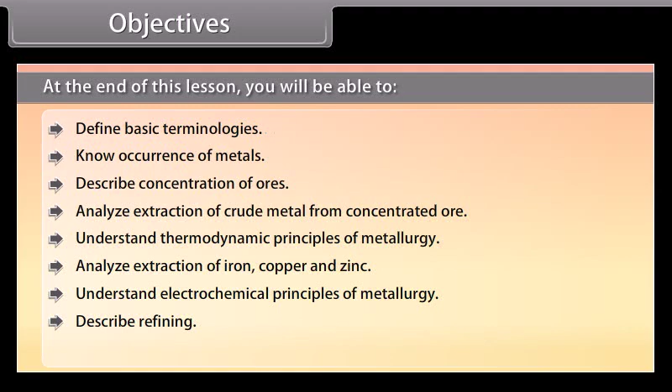At the end of this lesson, you will be able to define basic terminologies, know the occurrence of metals, describe concentration of ores, analyze extraction of crude metal from concentrated ore, understand thermodynamic principles of metallurgy, analyze extraction of iron, copper, and zinc, understand electrochemical principles of metallurgy, describe refining, and know the applications of aluminium, copper, zinc, and iron.

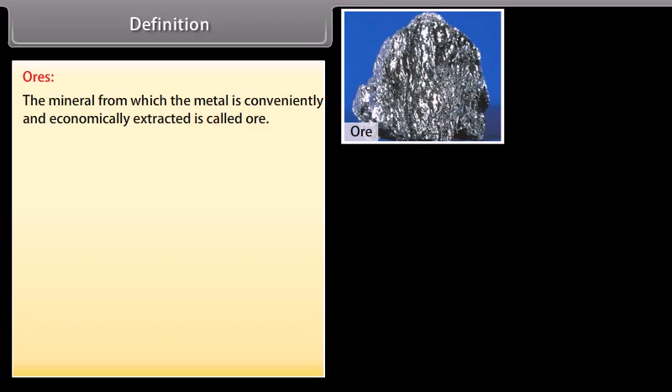Definition. Ores: the mineral from which the metal is conveniently and economically extracted is called ore. Gangue: the earthly and undesired constituents of minerals are called gangue. Metallurgy: the extraction and isolation of metals from ores is called metallurgy.

The extraction and isolation of metals from ores involves three major steps: concentration of the ore, isolation of the metal from concentrated ore, and purification of the metal.

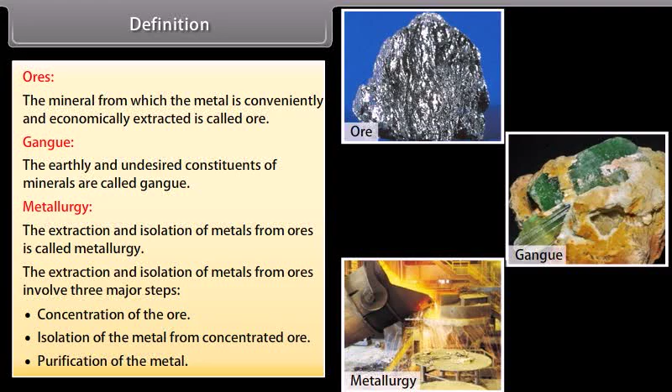Occurrence of metals. Oxygen is the most abundant element in the Earth's crust. Silicon is the second most abundant element in the Earth's crust. Among metals, aluminium is the most abundant. It is the third most abundant element in Earth's crust.

It is a major component of many igneous minerals, including mica and clay. Many gemstones are impure forms of Al2O3, and the impurities range from chromium to cobalt.

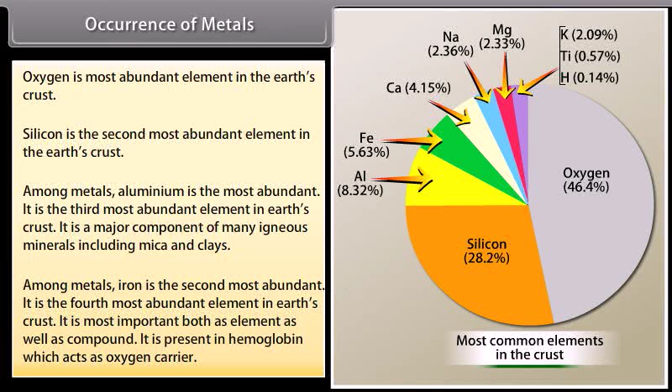Among metals, iron is the second most abundant. It is the fourth most abundant element in Earth's crust. It is most important both as an element as well as a compound. It is present in hemoglobin, which acts as an oxygen carrier.

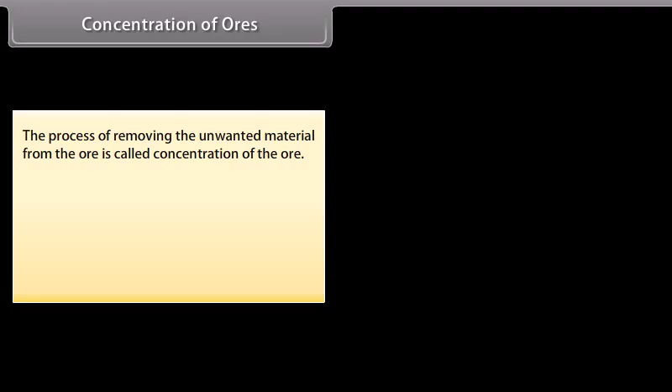Concentration of ores. The process of removing unwanted material from the ore is called concentration of the ore. The important methods for concentration of the ore include hydraulic washing, which is based on difference in densities of ore and gangue. In this process, ore is washed with a stream of water under pressure so that light impurities are washed away, whereas heavy ores are left behind.

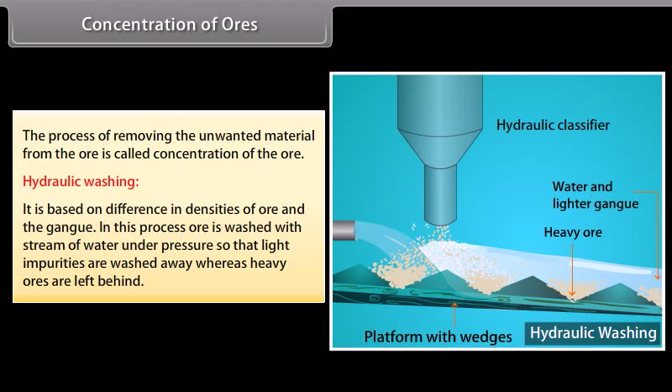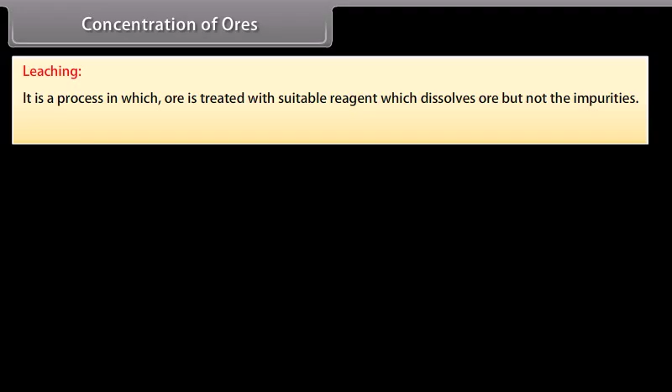Leaching is a process in which ore is treated with a suitable reagent which dissolves the ore but not the impurities. Leaching of bauxite is done to obtain alumina.

In this process, bauxite ore is treated with caustic soda. Al2O3 dissolves in the concentrated solution, leaving behind impurities. The aluminate in solution is neutralized by passing CO2 gas and hydrated Al2O3 is precipitated. The precipitate of Al(OH)3 is filtered, dried, and finally heated to about 1470 Kelvin to obtain pure Al2O3.

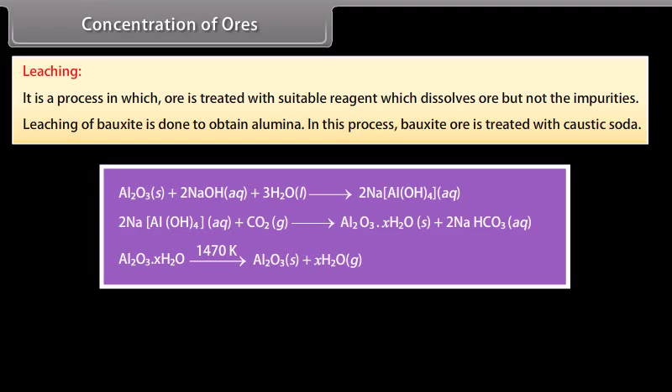Magnetic separation. This method is based on magnetic and non-magnetic properties of the two components of ore. The ground ore is carried on a conveyor belt which passes over a magnetic roller.

The non-magnetic particles leave the belt and fall off from it. The magnetic particles are attracted by the magnetic field and form a separated pile. This method is used to remove ore particles from cassiterite, magnetite, chromite, and pyrolusite.

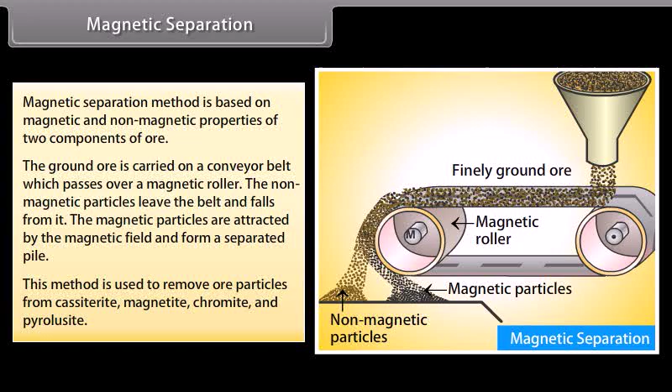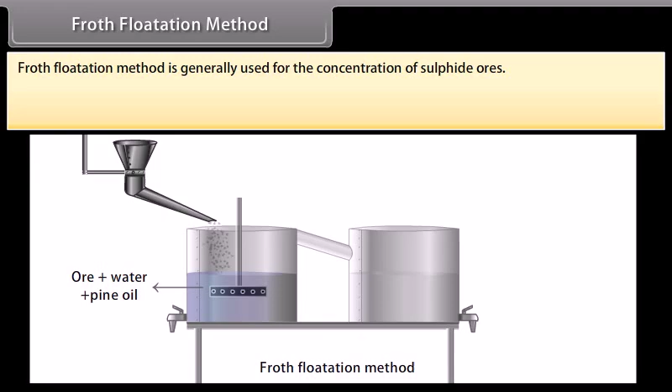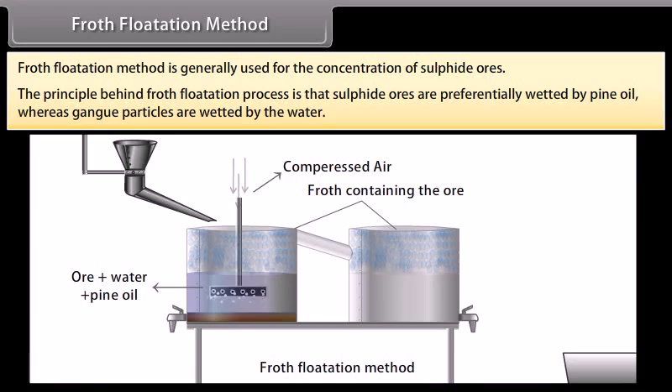Froth flotation method. This method is generally used for the concentration of sulfide ores. The principle behind the froth flotation process is that sulfide ores are preferentially wetted by pine oil, whereas gangue particles are wetted by water. In this process, a suspension of powdered ore is made with water.

Collectors like pine oil, fatty acids, and xanthates are added to it. Froth stabilizers like cresols and aniline stabilize the froth. The mineral particles become wet by oils while gangue particles by water.

A rotating paddle agitates the mixture and draws air into it. As a result, froth is formed, which carries the mineral particles. The froth is light and is skimmed off. It is then dried for the recovery of the ore particles.

Extraction of crude metal from concentrated ore. The concentrated ore must be converted into a form suitable for reduction. Oxides are easier to reduce. Thus, isolation of metals from concentrated ore involves two major steps: conversion to oxide and reduction of oxide to metal.

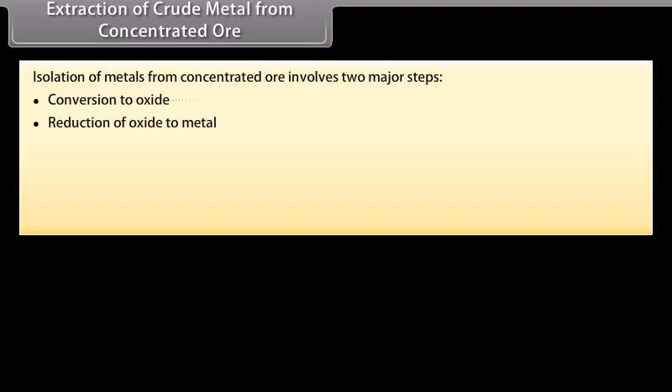Conversion of oxide: it is easier to reduce oxide than sulfide or carbonate ore. This can be done by two methods: calcination and roasting.

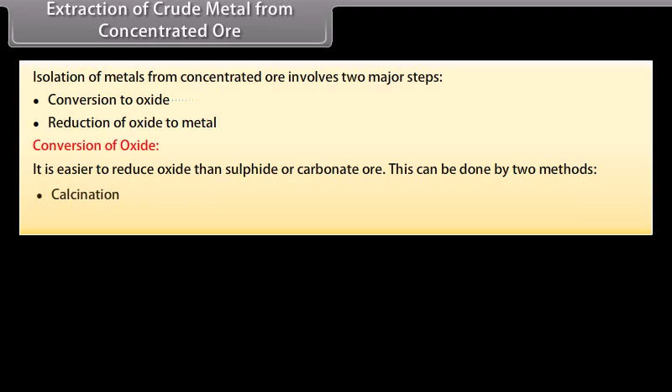Calcination involves heating when the volatile matter escapes, leaving behind the metal oxide. Roasting is a process in which ore is heated in a regular supply of air at a temperature below the melting point of the metal. Sulfide ores are converted into oxide by roasting.

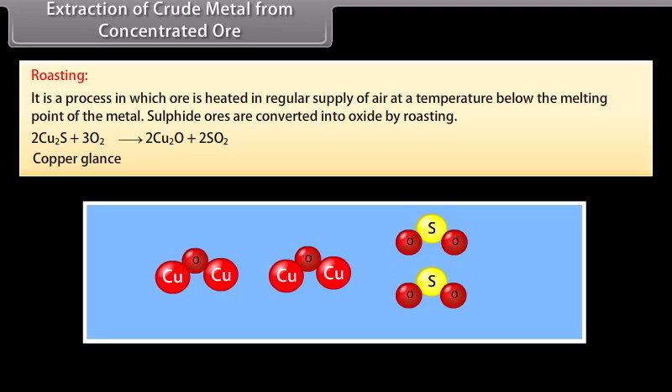Reduction of oxide to metal: the process of converting metal oxide into metal is called reduction. It needs a suitable reducing agent depending upon the reactivity or reducing power of the metal, for example, carbon, carbon monoxide, aluminium, and magnesium.

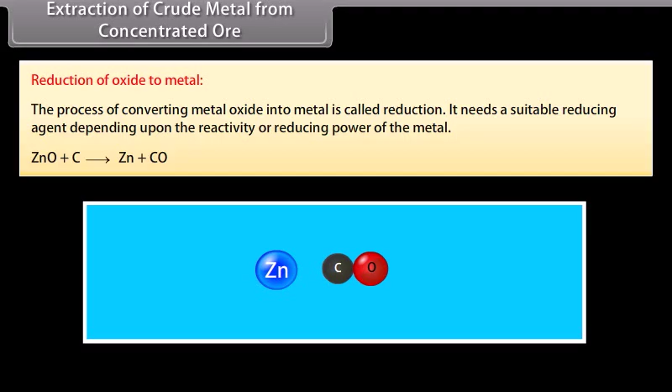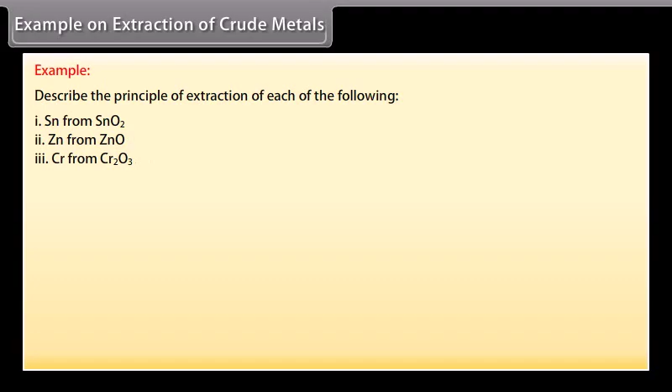Let's see the solution. Sn is obtained from SnO2 by using carbon as a reducing agent, since Sn is a less reactive metal. Zn is obtained from ZnO using CO as a reducing agent at 1600 Kelvin. Cr is obtained from Cr2O3 using the aluminothermic process.

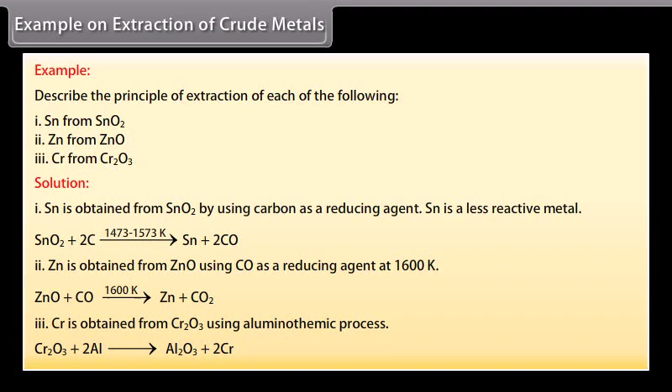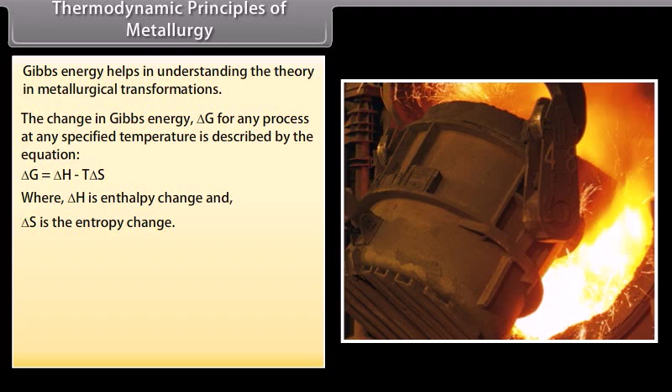Thermodynamic principles of metallurgy: Gibbs energy helps in understanding the theory in metallurgical transformations. The change in Gibbs energy, delta G, for any process at any specified temperature is described by the equation delta G equals delta H minus T delta S, where delta H is enthalpy change and delta S is the entropy change. When the value of delta G is negative, only then will the reaction proceed.

If reactants and products of two reactions are put together in a system and the net delta G of the two possible reactions is negative, the overall reaction will occur.

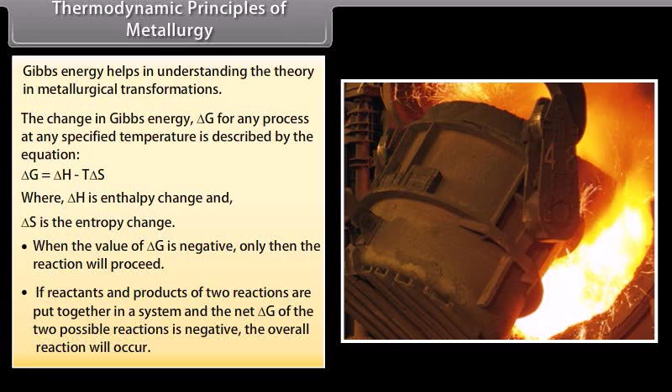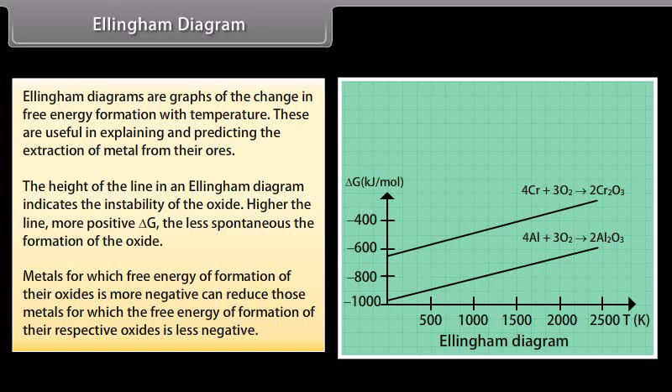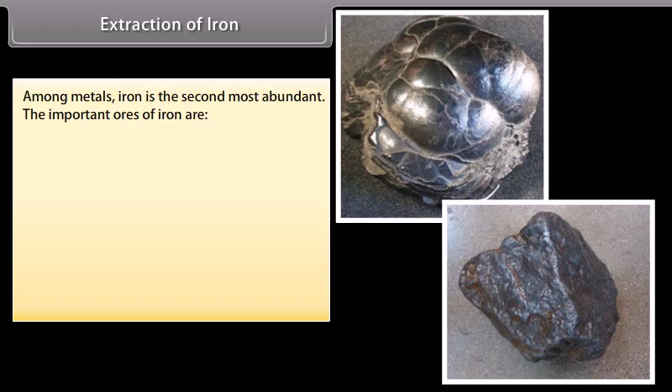Extraction of iron: among metals, iron is the second most abundant. The important ores of iron are hematite or red iron ore, limonite or brown ore of iron, magnetite, and siderite. Iron is generally extracted from its oxide ores. The ores generally have 20 to 55% iron.

Concentration of the ore: impurities of clay, sand, etc. are removed by levigation.

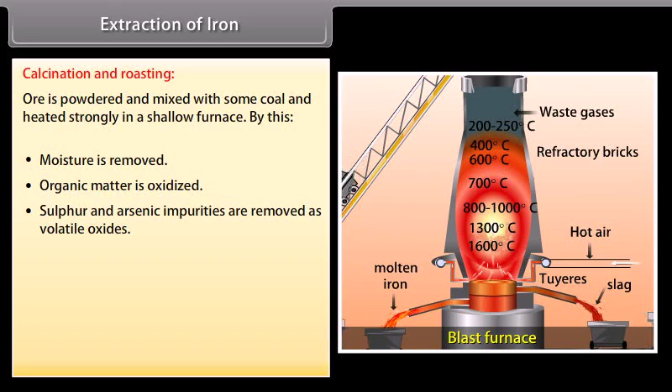Calcination and roasting: ore is powdered and mixed with some coal and heated strongly in a shallow furnace. By this, moisture is removed, organic matter is oxidized, sulfur and arsenic impurities are removed as volatile oxides, and the ore becomes porous so that the reactions become easier.

Smelting: the calcined and roasted ore is mixed with limestone and coke in the ratio of 8:1:4 and introduced into a blast furnace.

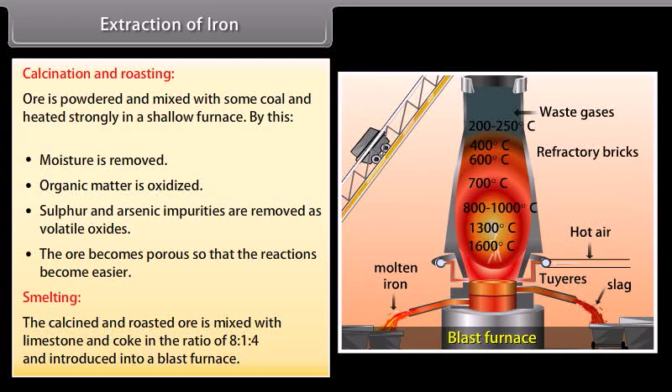Reactions in the blast furnace: the blast furnace is a tall chimney-like structure lined with refractory bricks. Dry and hot blast of air is passed from below. As the charge moves down, it passes through higher temperature zones. On the basis of variations in temperature in the different parts of the blast furnace, there are various zones where different chemical changes take place.

Combustion zone: this is the lowest part of the furnace. Here, coke burns in the hot blast of air. In this region, temperature varies from 1500 to 2000 degrees Celsius. Carbon dioxide rises upwards and meets with red-hot coke.

Upper zone of reduction: this is the uppermost part of the blast furnace. In this region, temperature varies from 250 to 700 degrees Celsius. Here, carbon monoxide reduces oxides of iron into spongy iron.

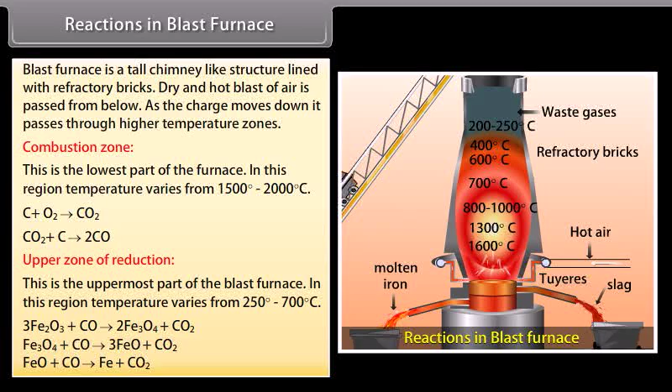Lower zone of reduction: final reduction occurs between 1000 and 1200 degrees Celsius in the central region of the furnace. Carbon obtained by dissociation of carbon monoxide combines with iron, and impurities also get dissolved in molten iron.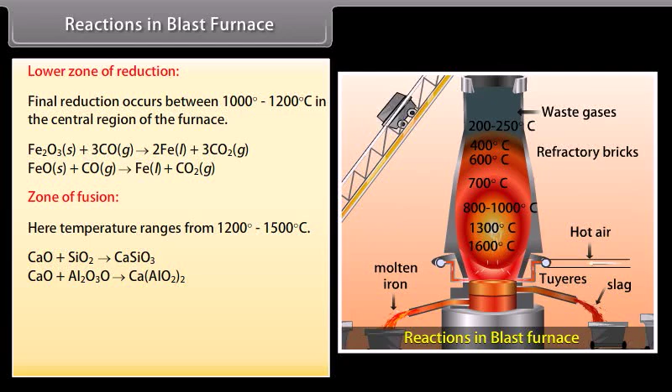Zone of fusion: here, temperature ranges from 1200 to 1500 degrees Celsius. Limestone decomposes into calcium oxide, which acts as a flux and combines with the impurities of SiO2 and Al2O3, removing them as slag. Molten iron collects at the bottom of the hearth of the blast furnace. The slag, being lighter, floats over molten iron and is removed through the slag hole.

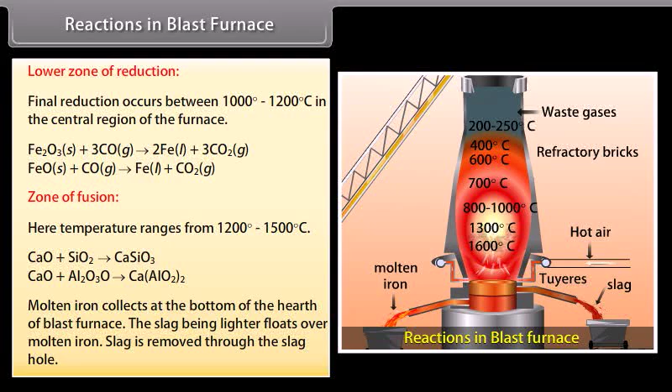Extraction of copper. Copper is found both in native state as well as in combined state. The main occurrence of copper is as sulfides, oxides, and carbonates.

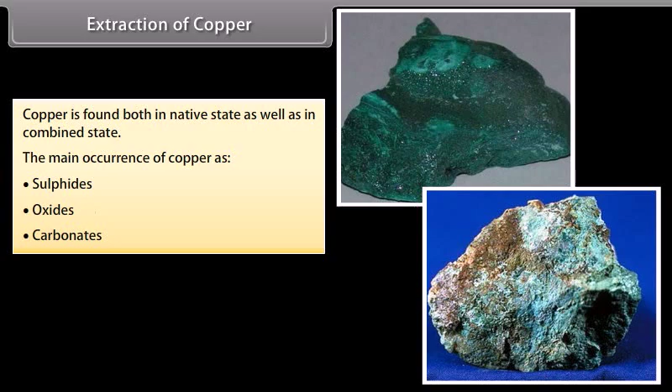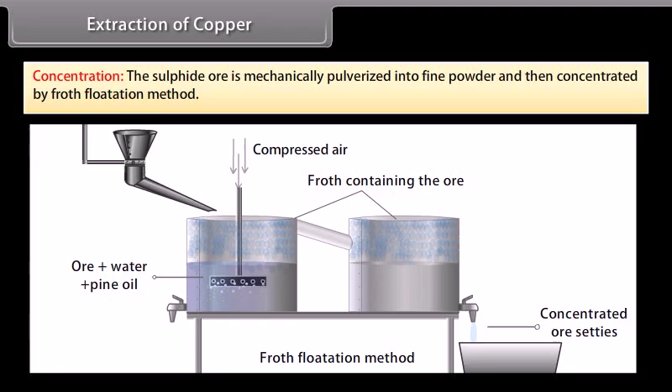The important steps involved in the extraction of copper are concentration. The sulfide ore is mechanically pulverized into fine powder and then concentrated by the froth flotation method.

Roasting. The concentrated ore is roasted on the hearth of a reverberatory furnace in excess of air.

Smelting. Roasted ore is mixed with a little coke and sand and heated with excess of air in a water-jacketed blast furnace. Most of the remaining iron sulfide is converted into oxide, which reacts with silica forming fusible slag of iron silicate. The slag floats over a molten layer consisting chiefly of Cu2S and a little FeS, called matte.

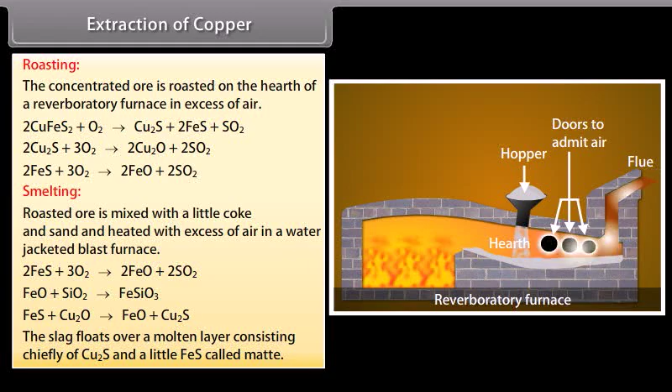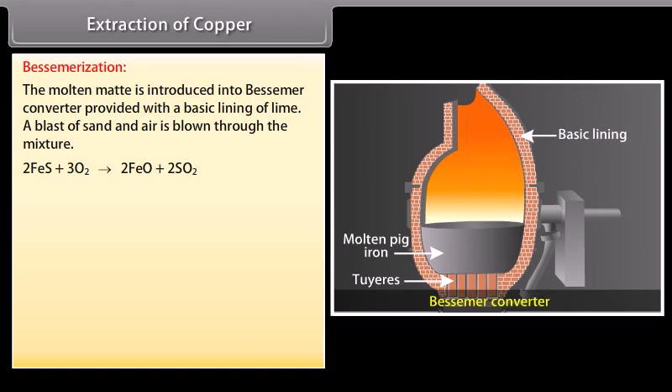Bessemerization. The molten matte is now introduced into a Bessemer converter provided with a basic lining of lime. A blast of sand and air is blown through the mixture.

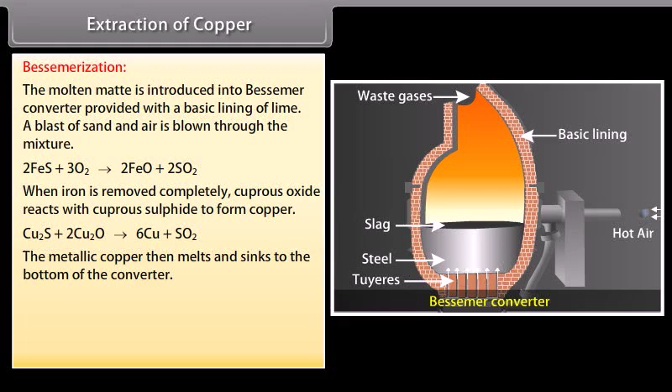FeO is removed as FeSiO3. When iron is removed completely, cuprous oxide reacts with cuprous sulfide to form copper. The metallic copper then melts and sinks to the bottom of the converter.

It is poured into steel molds. As it cools down, the SO2 dissolved in it escapes, giving a blistered appearance to the solidified metal. Hence, the product is called blister copper. It contains about 98% copper. Blister copper is refined electrolytically.

Extraction of zinc. The reduction of zinc oxide is carried out by coke at a temperature higher than that of Cu2O, because zinc is more reactive than copper.

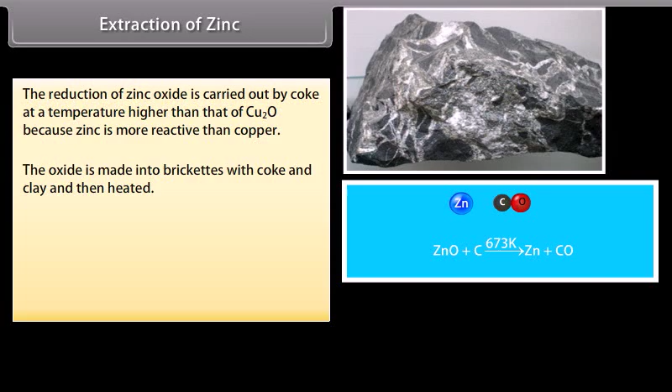The oxide is made into briquettes with coke and clay and then heated. Carbon monoxide formed can also reduce ZnO further to zinc.

The impure zinc is called spelter. It is refined by distillation followed by rapid cooling.

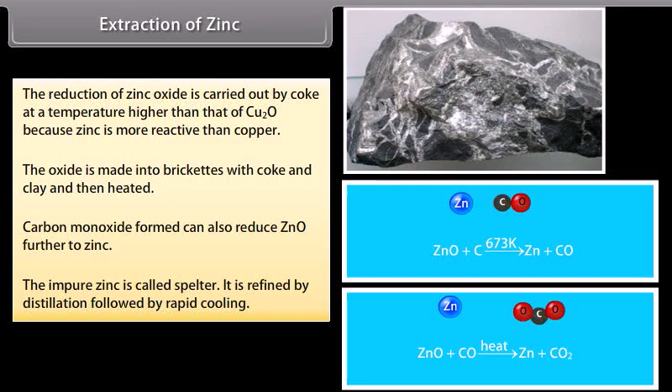Electrochemical principles of metallurgy. In reduction of molten metal salt, electrolysis is done. This method is based on electrochemical principles which can be explained by the equation delta G naught equals minus n E naught F, where n is the number of electrons and E naught is the electrode potential of the redox couple formed in the system.

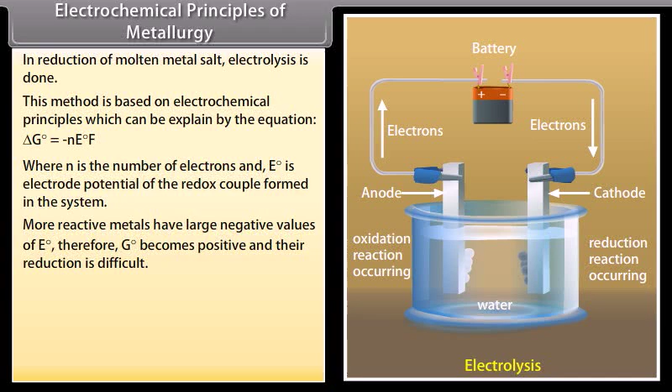More reactive metals have large negative values of E naught, therefore delta G naught becomes positive and their reduction is difficult. If the difference in two values of E naught of a redox couple is positive, then delta G naught will be negative, and a less reactive metal can be obtained from its salt by a more reactive metal.

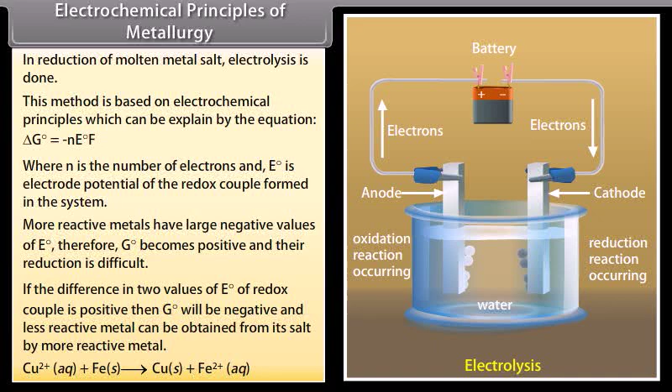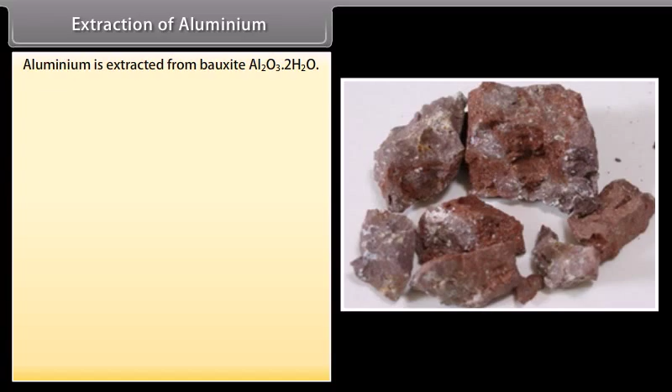Extraction of aluminium. Aluminium is extracted from bauxite, Al2O3.2H2O. Concentration of bauxite is done by the leaching method.

Purified Al2O3 is mixed with Na3AlF6 or CaF2, which lowers the melting point of the mixture and brings electrical conductivity. This process of electrolysis is known as the Hall-Héroult process.

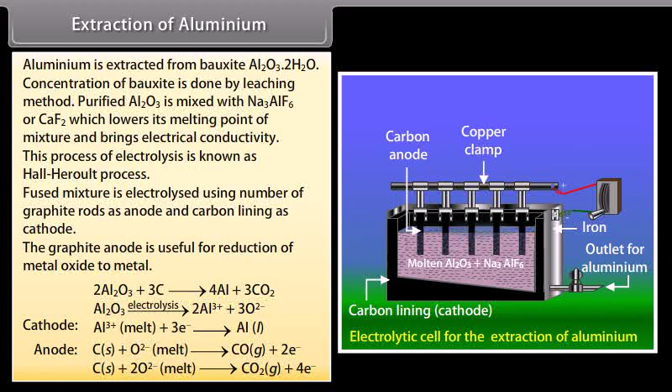The fused mixture is electrolyzed using a number of graphite rods as anode and carbon lining as cathode. The graphite anode is useful for reduction of metal oxide to metal.

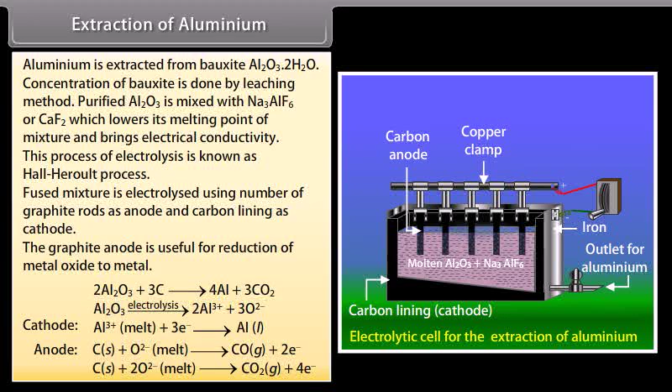Oxidation reduction. Non-metals are sometimes obtained from their minerals by electrochemical oxidation. For example, electrolysis of brine solution produces Cl2 at the anode.

The standard reaction gives the energy for oxidation of Cl- ions in water. A high positive value suggests that electrolysis is required. The minimum potential difference that can achieve oxidation of Cl- ions is about 2.2 volts, and n is equal to 2.

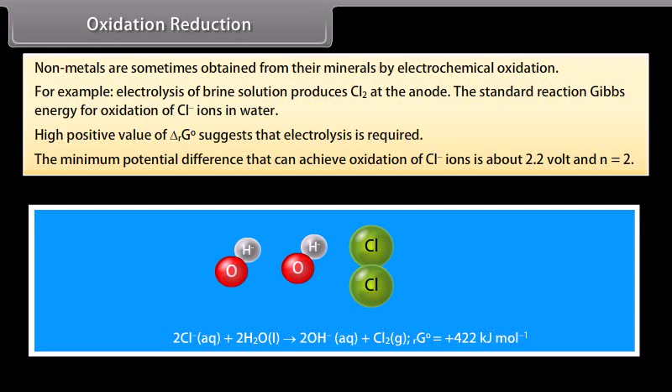But in aqueous solution there is also another reaction. This reaction can be driven by a potential difference of only 1.2 volts. Therefore, a high overpotential is required before a significant rate of reaction is achieved.

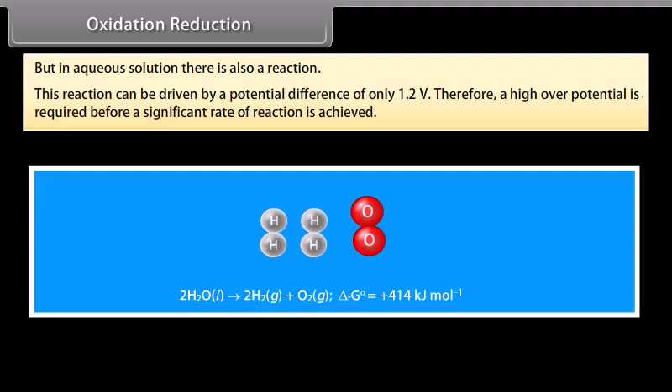Refining. A metal extracted is usually contaminated with some impurity. For obtaining metals of high purity, several techniques are used depending upon the differences in properties of the metal and the impurity.

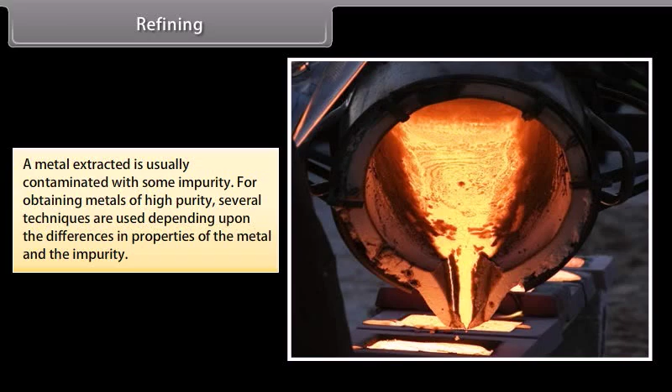Distillation. It is the process used to purify those metals which have low boiling points. The impure metal is evaporated to obtain the pure metal as distillate, for example, zinc and mercury.

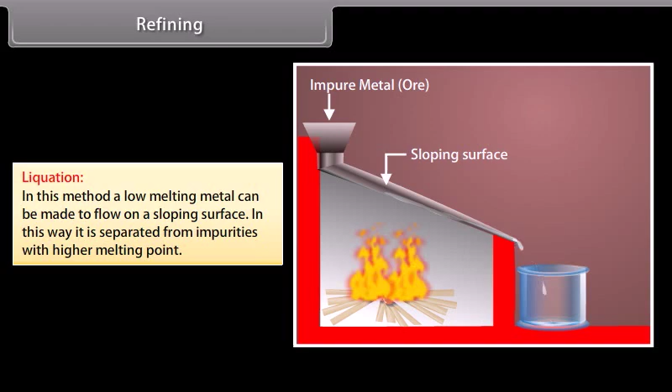Liquation. In this method, a low melting metal can be made to flow on a sloping surface. In this way, it is separated from impurities with higher melting point, for example, tin.

Electrolytic refining. In this method, impure metal is taken as anode, pure metal as cathode. A soluble salt of the same metal is used as electrolyte. When electric current is passed, impure metal forms metal ions, which are discharged at the cathode forming pure metal, for example, copper, zinc and aluminium.

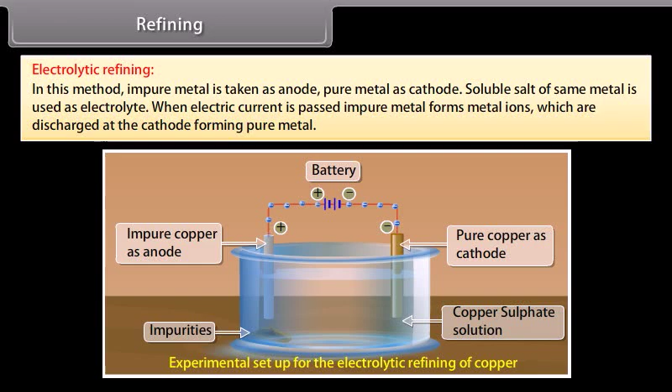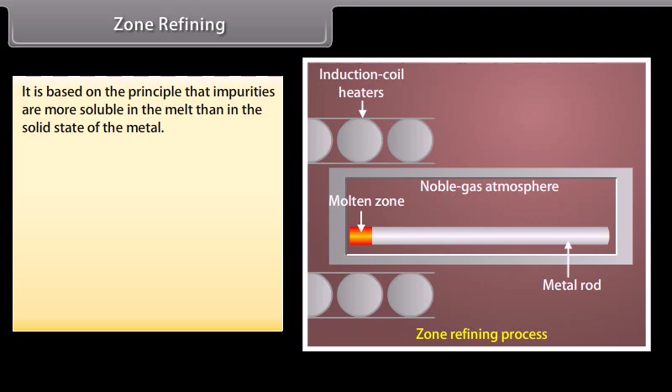Zone refining is based on the principle that impurities are more soluble in the melt than in the solid state of the metal. The impure metal is heated with circular heaters at one end of a rod of impure metal. The molten zone is moved forward along with the impurities and reaches the other end, where it is discarded. Pure metal crystallizes out of the melt. The process is repeated several times, with the heater moved in the same direction. For example, it is used for purifying semiconductors.

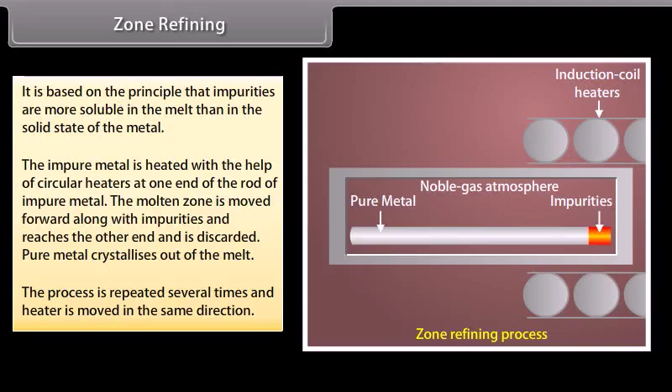Chromatographic method is based on the principle of separation or purification by chromatography, which relies on differential adsorption on an adsorbent. In column chromatography, Al2O3 is used as the adsorbent. The mixture to be separated is taken in a suitable solvent and applied on the column. It is then eluted out with a suitable solvent. The weakly adsorbed component is eluted first, followed by the more strongly adsorbed, and so on. This method is suitable for elements available only in minute quantities, where the impurities are not very different in chemical behavior from the element to be purified.

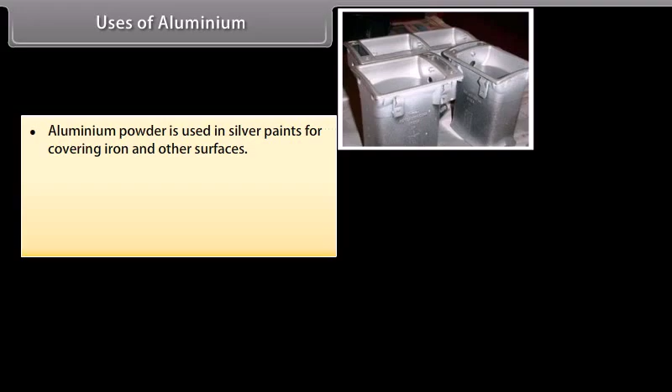Uses of aluminium: Aluminium powder is used in silver paints for covering iron and other surfaces. It is used for making alloys used in automobiles and aircrafts, and for making tin foils for wrapping cigarettes and confectionery.

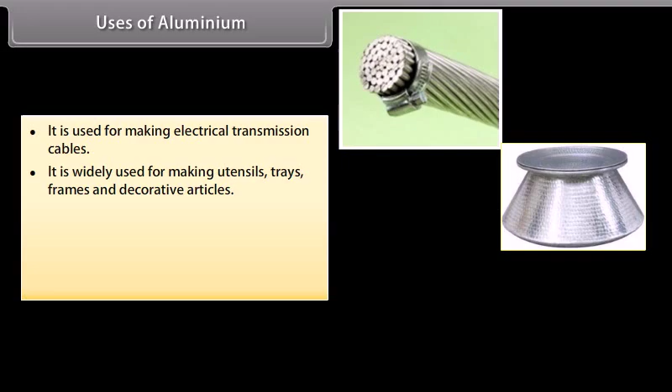It is used for making electrical transmission cables. It is widely used for making utensils, trays, frames, and decorative articles. Because of its lightness, good conductivity, and resistance to corrosion, it is used for making useful alloys, for example, magnalium, duralumin, and aluminium bronze.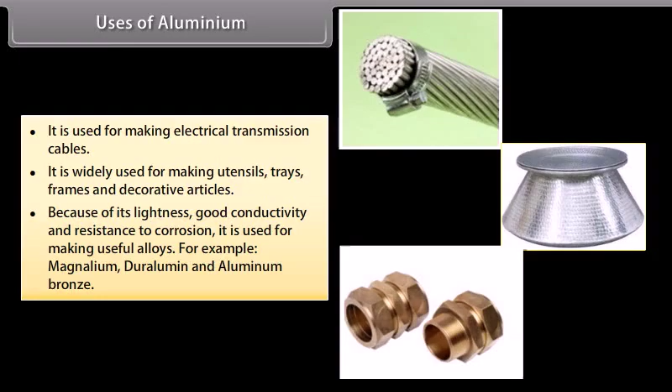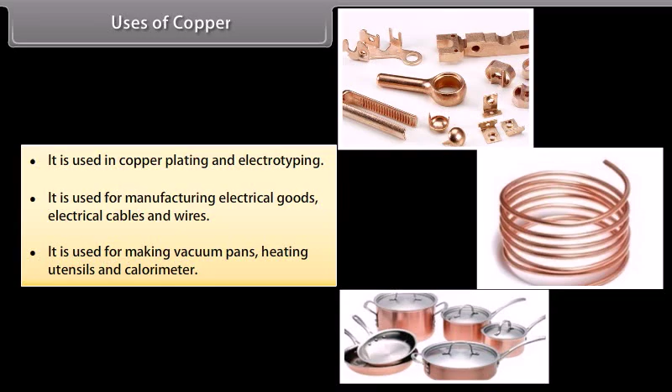Uses of copper: It is used in copper plating and electrotyping. It is used for manufacturing electrical goods, electrical cables, and wires. It is used for making vacuum pans, heating utensils, and calorimeters. Many of its compounds are used as insecticides, pesticides, and pigments. It is used in the manufacture of important alloys, for example, brass, German silver, and gunmetal.

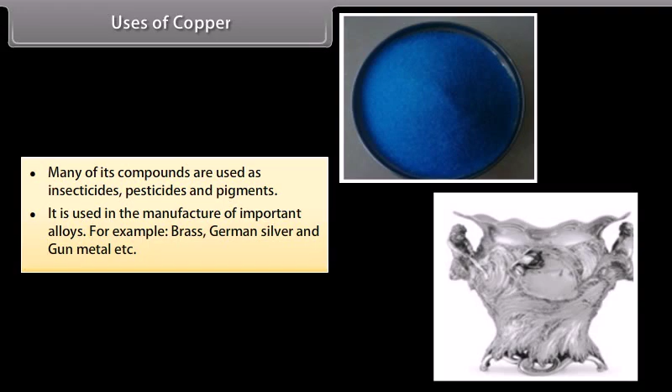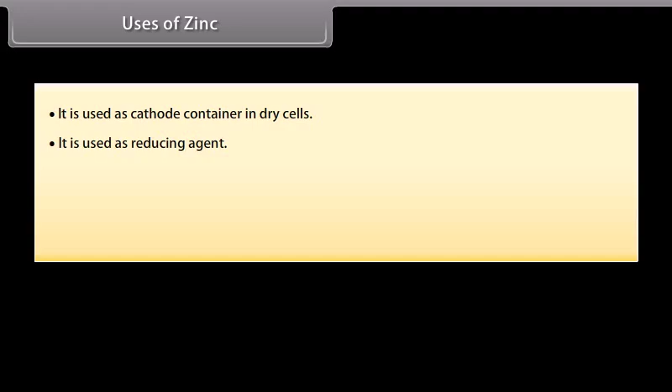Uses of zinc: It is used as the cathode container in dry cells. It is used as a reducing agent. It is used in galvanization of iron and steel, and in the extraction of silver and gold by the cyanide process. It is also used in the manufacture of important alloys, for example, brass and German silver.

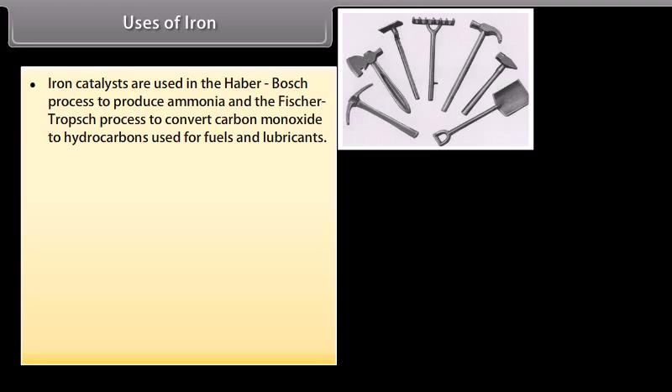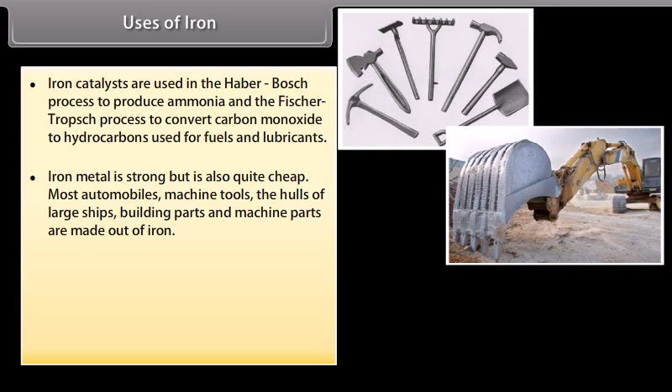Uses of iron: Iron catalysts are used in the Haber-Bosch process to produce ammonia and the Fischer-Tropsch process to convert carbon monoxide to hydrocarbons used for fuels and lubricants. Iron metal is strong but also quite cheap. Most automobiles, machine tools, the hulls of large ships, building parts, and machine parts are made out of iron.

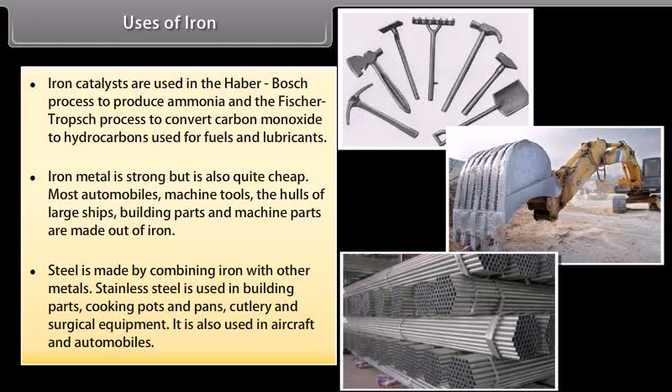Steel is made by combining iron with other metals. Stainless steel is used in building parts, cooking pots and pans, cutlery, and surgical equipment. It is also used in aircrafts and automobiles.

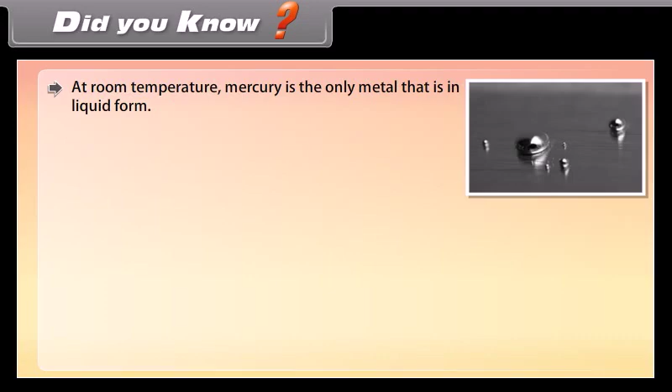Did you know? At room temperature, mercury is the only metal that is in liquid form. Bronze is a metal alloy made from copper and tin, with copper making up the larger amount, usually between 80 to 95%. Iron is the sixth most common element found in the universe.

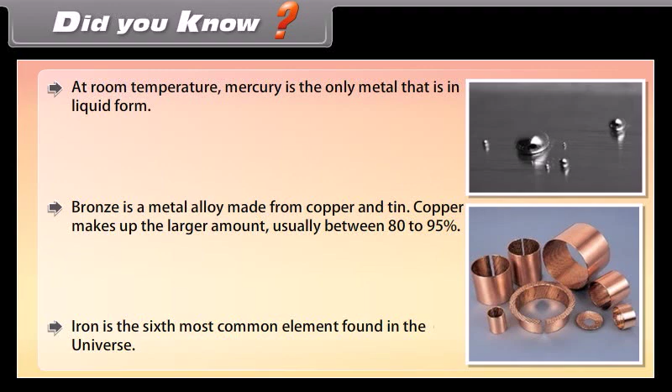Summary. Let us summarize what we have learned.

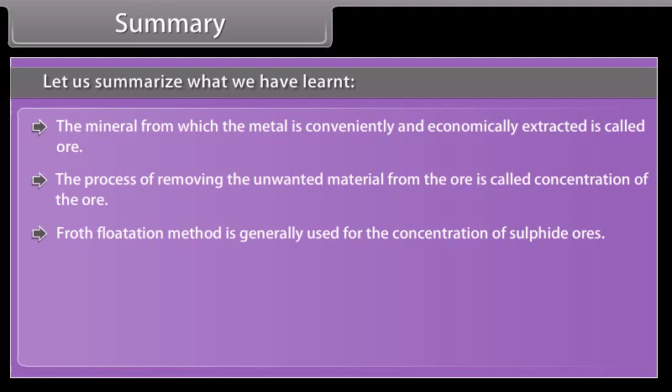The mineral from which a metal is conveniently and economically extracted is called ore. The process of removing unwanted material from the ore is called concentration of the ore. Froth flotation method is generally used for the concentration of sulfide ores.

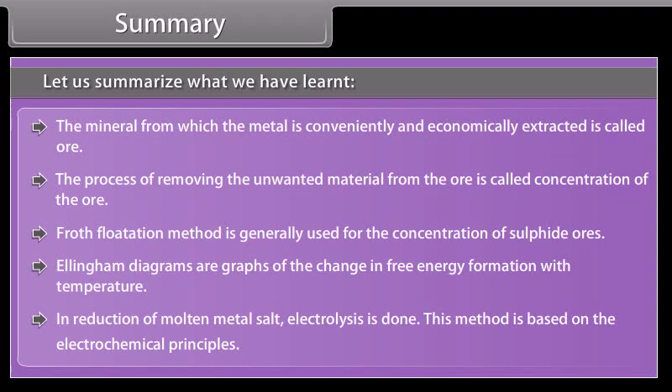Ellingham diagrams are graphs of the change in free energy of formation with temperature. In reduction of molten metal salt, electrolysis is done, a method based on electrochemical principles. For obtaining metals of high purity, several techniques are used depending upon the differences in properties between the metal and the impurity. These techniques are known as refining.

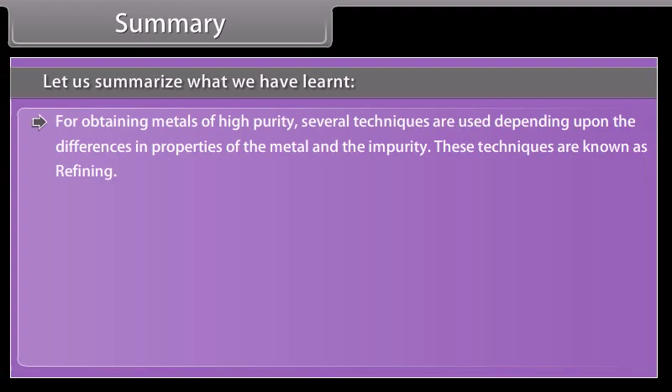Zone refining is based on the principle that impurities are more soluble in the melt than in the solid state of the metal. The chromatographic method is based on the principle of separation or purification by chromatography, which relies on differential adsorption on an adsorbent.